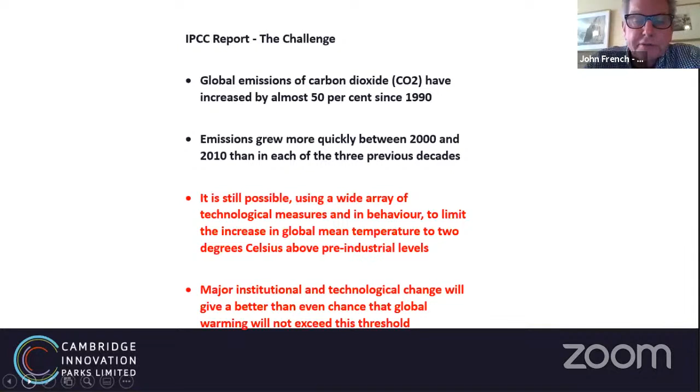So just moving here to some of the key findings, you might think we're making progress against climate change, but actually we're making very poor progress at the moment, with something like a 50% increase in CO2 levels since 1990. And they continue to grow. So without dwelling on this too much, we have to find new technological measures and changes in behavior to limit the increase in global mean temperatures. And that's to 2 degrees. At the moment, we're on track to probably nearer 4 degrees. So it's important that the whole sector comes together, especially in construction, to address this.

Now, how do we know the energy performance of our buildings? We can use EPC certificates or other forms of proxy assessment, or we can take aerial photographs and use heat cameras. And so this is an example of a heat camera taken of the University of East Anglia. This is actually a few years ago now, but you can see the heat loss that's coming from these buildings. This is not what you want. You don't want to be really seeing any heat loss from these buildings, because that equates to high levels of energy usage and by default, high levels of carbon dioxide emission in order to power these buildings.

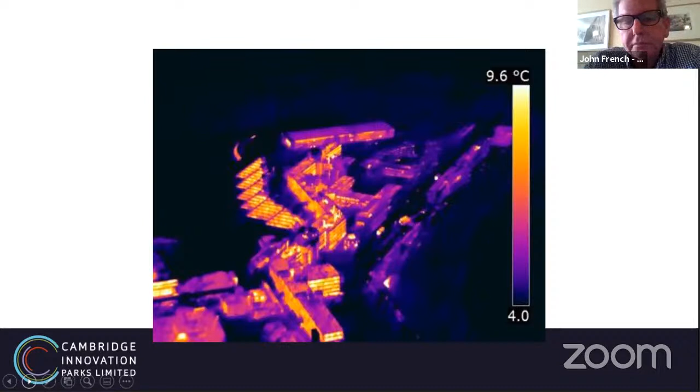So really, to get to zero carbon, we need to move away from steel and concrete. The built environment is responsible for some 40% of the UK's carbon footprint. We need to start thinking about reducing what we call embodied carbon, and that's the emissions associated with building, extracting, manufacturing, packaging, transporting, and constructing, all aspects of creating and disassembly of buildings. We need to look about getting away from too much steel, perhaps using wood in future, and looking for long life cycles and end-of-life strategies for buildings, which don't return carbon dioxide back to the atmosphere. Lots of work is going on around this, and we have the Construction Declares group, which are moving ahead very quickly on this. But we do need to take serious and bold actions to mitigate climate change.

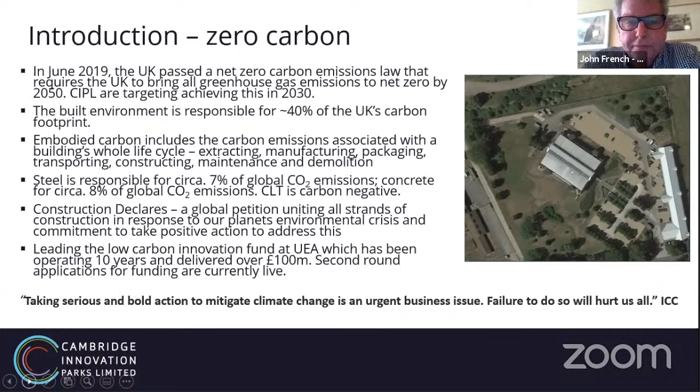Next slide, please. So just talking a little bit about the history and legacy, I'm going to focus on two projects. One is the University of East Anglia's Enterprise Centre. This was probably the first Passive House and BREEAM Outstanding building in the commercial and university sector when it opened in 2015. But in particular, it focused on local supply chains and the use of natural materials.

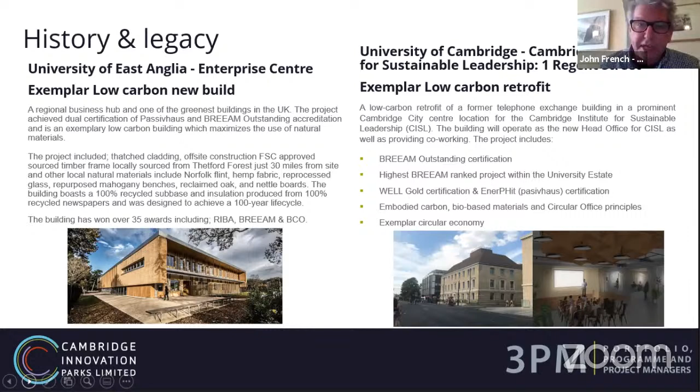And then the University of Cambridge, CISL as we call it, the Cambridge Institute for Sustainable Leadership. We are currently doing a deep retrofit of what used to be the telephone exchange in Cambridge. And that project is a live project on site at the moment. We'll talk in a moment about the performance criteria that we've set for both of these projects.

Next slide. Now, the Enterprise Centre, to start with, got off to a bit of a slow start. We started planning it in 2008, got the funding in 2011 and went to site and completed it by 2015. And then it started to get recognition because of its green credentials. Here we are seeing the Passive House magazine ask if it's the UK's greenest building, which I think it may still be. But we're always delighted to hear about other or better examples, because the whole point of projects like this is to set the standard for others to work with.

Next slide, please. Now, the standards we set for that project are summarised here. The key ones I'm going to just pick out: 100-year design life, Passive House certification, BREEAM Outstanding, very low embodied energy, focus on local supply chains, high use of biorenewable materials, in fact we said 70%, and integrating soft landings and post-occupancy evaluation into the project delivery.

Can you move to the next slide, please? Great. Here's a picture of it. Rather beautiful building. And you can see from this that it is pretty much all timber and natural products, except for the lime-rendered lecture theatre in the middle. And on the left-hand side, you can see thatch. It's got a vertical thatch cladding. And on the right-hand side, it's using an exterior MDF board as a fascia panel. So quite nice design, solar panels on the roof, very contemporary and very much in the spirit of architecture at the University of East Anglia.

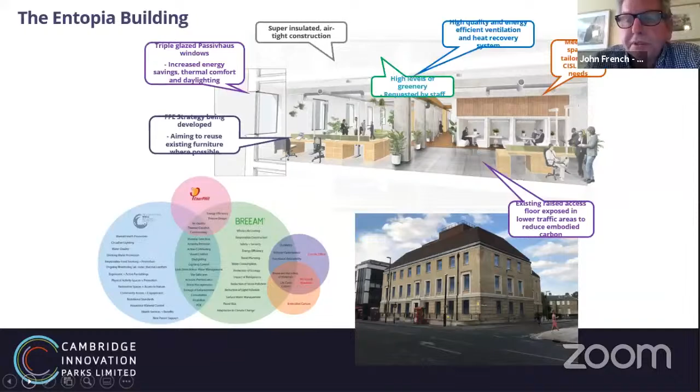We are on project, as I said. We've mapped the different criteria and performance criteria. We're working with the WELL standard, with EnerPHit, with BREEAM. And we've also said we would like this to be an exemplar of the circular office and also of bio-based material. So pretty challenging. We'll move on to the next slide, and you can see there, for comparison, the performance criteria that we've set for this project.

Where does this differ from the Enterprise Centre? Well, we've included in this the WELL standard, because that isn't directly targeting environmental performance specifications. It's targeting health and well-being, and we're looking to create a space that is very good for the user and is good for health and well-being. So that's taken us into new territory. We've also introduced the circular economy, resource utilisation, minimising waste, and maximising upcycling and recycling as a key element of the project.

This shows the mapping of criteria. This was developed by our colleagues at BDP. And you can see from this how the WELL standard, the EnerPHit standard, the BREEAM standard maps onto these other criteria. So there's a helpful level of overlap. The passive house standard, which is really driving us down to very, very low levels of energy consumption, only maps really onto air quality, thermal comfort, and the commissioning of the building. So it's quite narrow in its focus, but it is really, really helpful in driving down energy use. Okay, next slide, please.

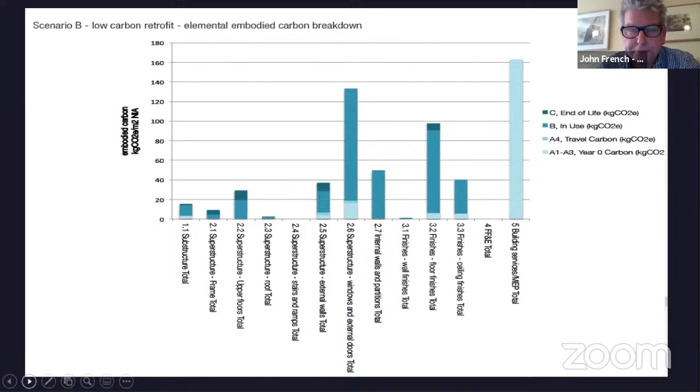What's the effect in terms of the appearance? Well, this building is in a conservation area in the city of Cambridge. So the only fundamental change that you'll notice from the outside is the fact that the windows, which were traditionally a sash window with rather ineffective secondary glazing, have become quite advanced triple glazed windows. We've removed any obstacles to the light transmission, and we've modelled the effect of those windows on the light levels, but we've also modelled the effect on reduced energy consumption, again, by transmitting more light into the building. So it will give it a contemporary look.

This was highly contentious because the planning approval process had to be prepared to take on board this level of change in a conservation area. So that was something we had to argue for at committee, but we did eventually get this through. So again, a helpful precedent, I think, in terms of adapting old buildings into a new climate context.

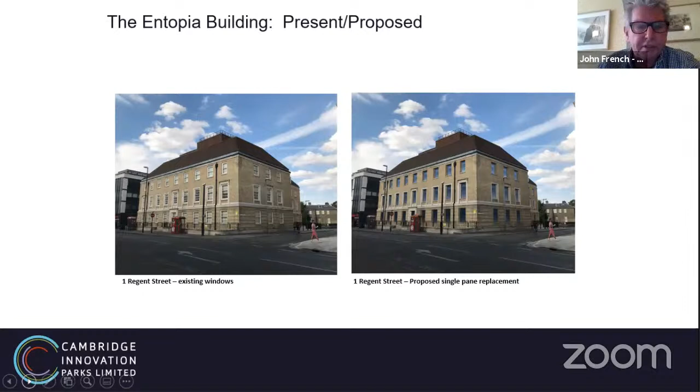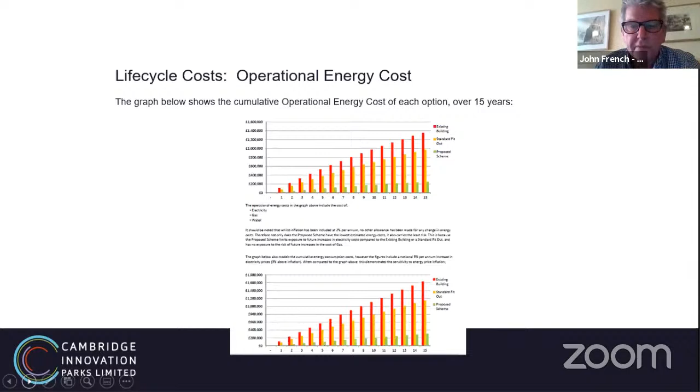Energy consumption cost. Why would you do this? Obviously, your conscience drives you to address low carbon, but we're all businesses, and this has got to make sense. And if you're going to invest upfront in a deep retrofit, then it has to be possible to get some payback. So we've done some modelling on this, but if we just look at the top graph here, you can see the existing building is the red lines, standard fit out, Part L, that's the orange, and then the proposed scheme which we're now delivering looks at your energy costs here over 15 years. So we've saved over £1 million based on current energy cost and energy value. We've saved over £1 million in energy costs by investing in these upgrades.

At Cambridge Innovation Parks, where I'm Director of Sustainability, we have taken this whole approach to a campus level. So we're now saying, let's not just look at buildings in isolation, let's look at a whole campus. And we're currently in planning to have this scheme go to committee in June. This is interesting because we've got historic buildings, we've got a large former MOD building in the centre, we've got buildings at either side of it that are new timber frame structures.

And we are progressively increasing the quality and performance of these buildings in terms of not only their carbon footprint, but reducing their energy consumption and addressing the usability through the use of timber-based materials. And we've gone with a sawn timber approach on this. So we've moved away from glulam on the grounds of cost, and we're looking at affordability as a key indicator for delivering this scheme.

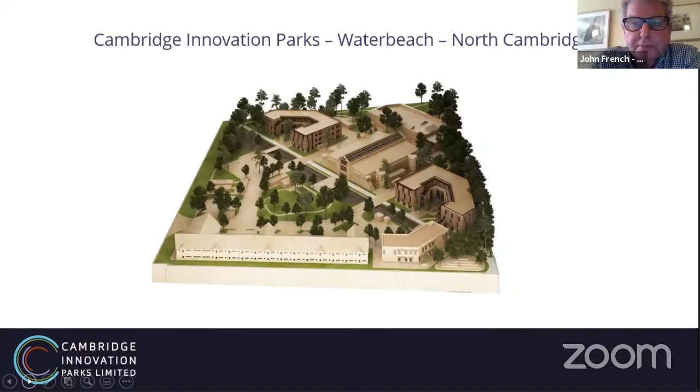So CIP's journey to zero carbon is looking at not only a master plan, but also incremental improvements in buildings, natural ventilation, use of air source heat pumps, large windows for natural light, modular construction. We're looking at what you would recognise as off-site construction, manufacture, modern methods of manufacture, and bringing it to site for erection.

Significant use of renewables and EV charging points. But the key difference really here is the complete lack of wet trades and the move to modularity and off-site construction.

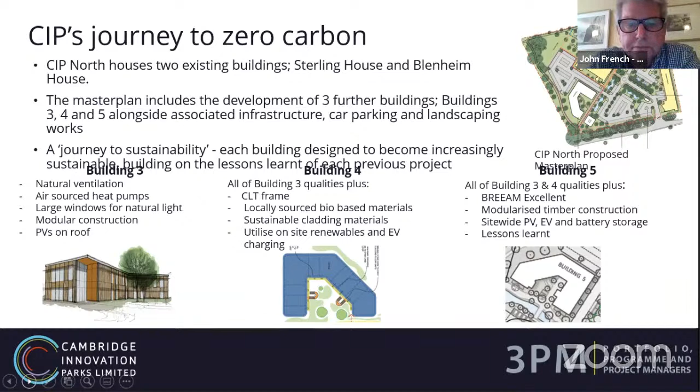CIP is developing several sites. We've got, as well as the north site at Waterbeach, we are currently developing our full business case for West. So this is a site, as you come into Cambridge on the west side, we're looking to have a whole campus approach on an 11.5 acre site as you go past Hardwick on the way into Cambridge.

This is particularly interesting because here we're saying, let's look at buildings that provide for businesses that are in the science park and low carbon community, that are exemplary in themselves as companies, as tenants, but let's build exemplary low carbon buildings, minimize the carbon footprint of those buildings, and have an integrated campus approach that copes with all aspects of energy and renewables, which takes us right through to sustainable travel planning as part of that. We've appointed architects on this, and we're making good progress on this scheme at the moment.

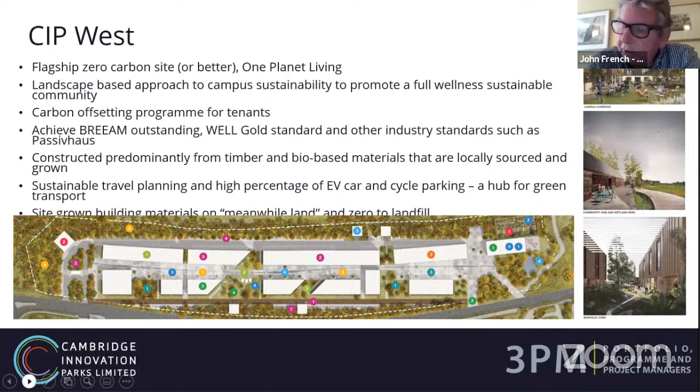Got lots of ideas. We're interested in things like plants and biophilic, having a biophilic core, the health and well-being concept. And we're looking at essentially a green network, the integration of the wider plant-based environment on the site with the buildings and the users.

We better speed up a little bit, I think, Nathan.

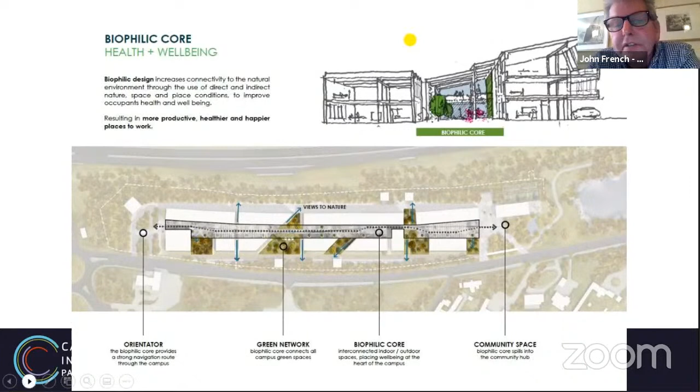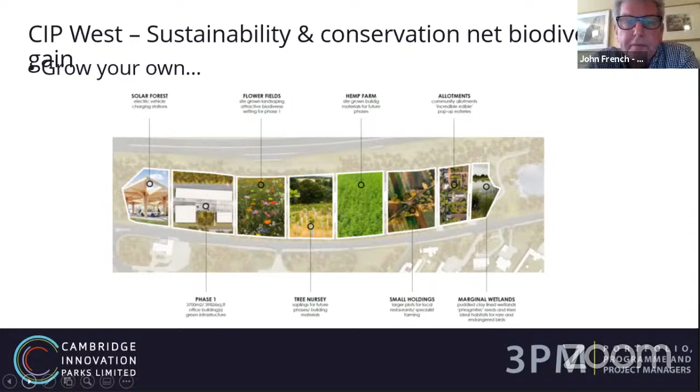And here are some ideas we've got around aspects of different parts of the ecology being integrated into the whole scheme. Here's our timeline. So as I said, I started with those slides at the beginning looking at energy and carbon and climate change. We are planning to get to 75% carbon reduction by 2030. And we have plotted this out in terms of our developments, both on north and on west.

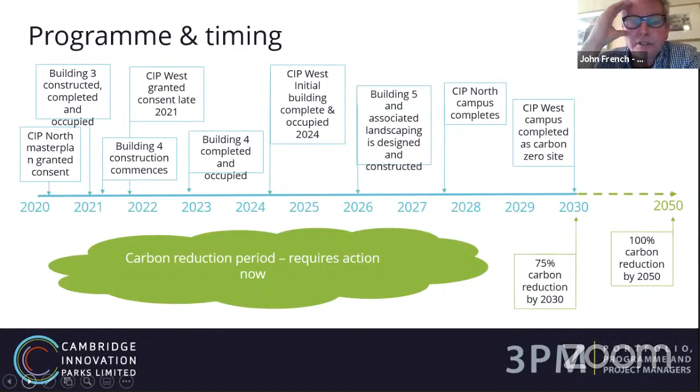This is quite challenging because we've got to both simultaneously build new buildings to new standards, but we've also got to go back and retrofit the old ones to meet those standards as well. So the learning from projects like the university's One Regent Street project is absolutely critical going forwards, because retrofit is not quite as easy as it looks. It's harder, in fact, than new build.

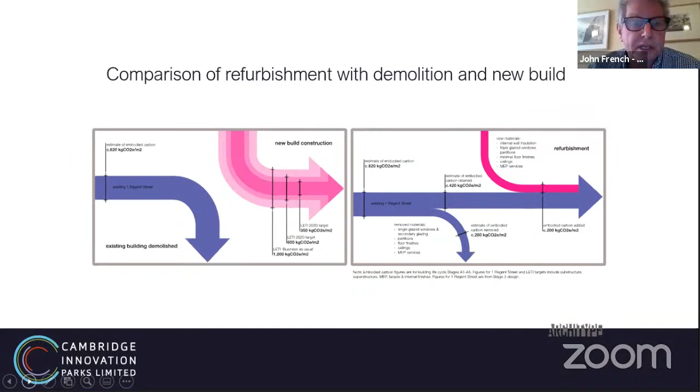We have a big debate running at the moment as to the merits of refurbishing versus demolition. And these slides, which will be available to you, show how we are currently trying to understand the carbon footprint associated with retaining buildings as opposed to basically knocking them down and building new ones which are better performing. So I think the jury is out in terms of which is the best way to go on this at the moment. Obviously, if you can recycle and reuse, it's better. But as I said, it's harder and it has more technical challenges associated with it.

Embodied carbon, just a note, there are lots of different standards out there. We use a tool called Ecolab, but you should be aware of the fact that there are several different standards. CIBSE has just published its TM65 Embodied Carbon in Building Services. You've also got advice coming from the structural engineers, and there's also the new London guide called LETI.

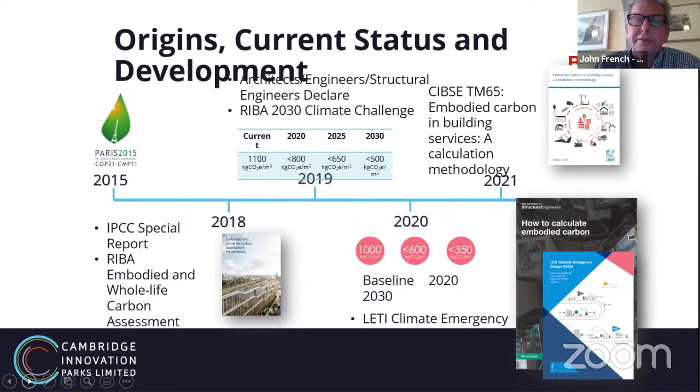It's worth pausing and reviewing all the different approaches to embodied carbon that exist, and perhaps taking advice on which way to go in terms of measuring and reporting embodied carbon, because it's not a level playing field at the moment, which makes it very hard for developers, quite frankly, because you need to know where you want to be on that.

The Oxford-Cambridge arc, I think we're going to see a lot of developments in the sustainability space as this area opens up and as we see this huge level of growth that is expected between Oxford and Cambridge. And I see our project on West Cambridge as being one of the first of many on the Oxford arc.

So basically, it's not too late. You might think it feels a bit like it's getting a bit hot around here with climate change, but the reality is that you can start planning in significant change.

And I'm currently looking at projects around more basic buildings, industrial warehouses, commercial units, to see if I can come up with a toolkit for relatively easy retrofit of some more traditional buildings that are widely available on industrial estates and industrial units, because we clearly need to address that area urgently as well.